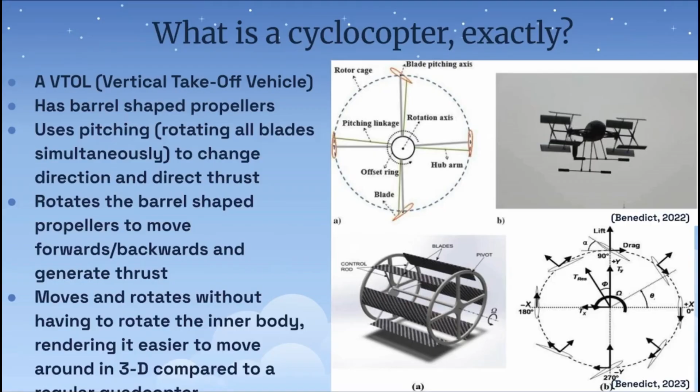The decoupling of the fuselage orientation from the flight path allows for immediate seamless transitions between hovering, forward flight and backward flight, rendering the vehicle significantly more maneuverable in complex 3D environments compared to conventional rotorcraft. The core of this agility lies in the mechanical assembly of the rotor cage. The system utilizes teardrop-shaped airfoils connected to a central hub via a pitching linkage.

The thrust vectoring is achieved through eccentricity, which is controlled by offsetting the center of the control ring relative to the axis of rotation. Shifting this offset center mechanically forces the blades to oscillate. This oscillation is defined by two variables, magnitude and phase angle. The phase determines the thrust direction.

For example, phasing the blade pitch to maximize the angle of attack at the top of the arc generates upward lift. Shifting that phase angle by 180 degrees directs its thrust downward. This requires a robust assembly of servos, pitch links, and pivoting blade struts to maintain structural integrity, managing dynamic aerodynamic loads.

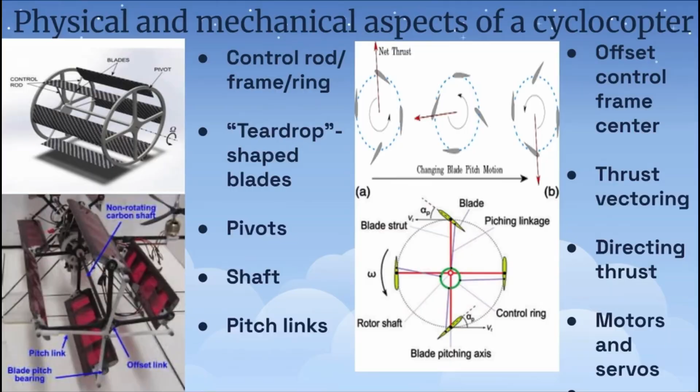My experimental design is grounded mainly on three foundational studies. First, Benedict et al. 2016 established the feasibility of small-scale cyclocopters with an 800-gram vehicle. They demonstrated that a passive pitch mechanism could successfully achieve stable flight with 8 degrees of freedom.

Crucially, they implemented a hybrid control strategy where pitch, roll and yaw were managed entirely by differentially varying the thrust vectors of the 4 individual rotors. This eliminates the need for traditional control surfaces, confirming that the mechanical architecture is viable and serves as a baseline for my larger 3 to 5 kilogram prototype.

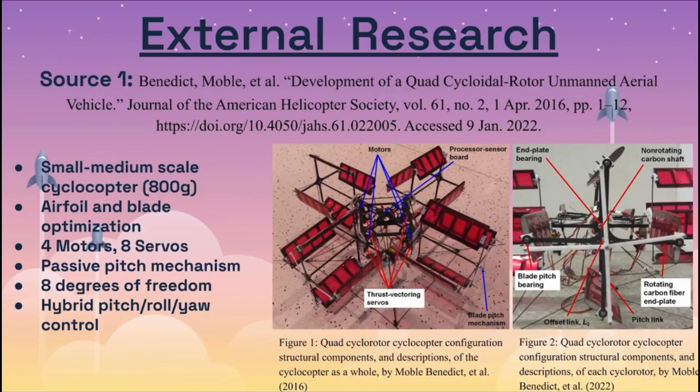Rami and Pascoa 2019 provided the critical aerodynamic data for takeoff and landing, using advanced fluid dynamics simulations to analyze the rotor's behavior and ground effect. They found that cyclorotors generate a concentrated pile-like downwash flow when operating in close proximity to the ground, specifically at low altitudes like 2 meters.

This flow obstruction creates a high pressure level that results in a positive ground effect. This phenomenon significantly enhances the total efficiency by providing a cushion of air for the aircraft. However, the data revealed that static operating schedules are inefficient. Optimal settings shifted from a 30-degree pitch at 200 RPM at 2 meters to a 40-degree pitch at 400 RPM at 5 meters. This necessitates an active control system to dynamically adjust these parameters during flight.

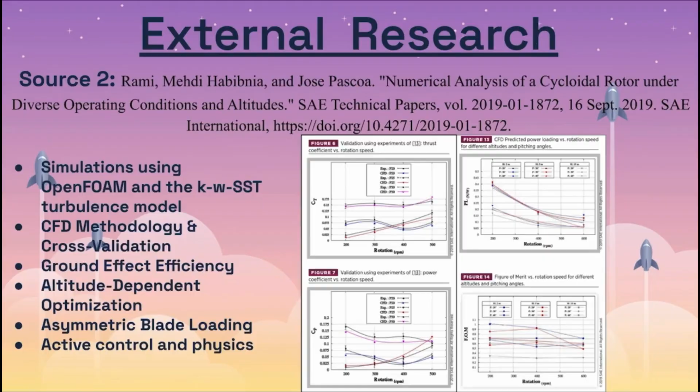Halder and Benedict 2022 addressed the physics of scalability, which is critical for my heavier build. They identified a fundamental conflict between aerodynamic and structural scaling. Aerodynamically, scaling up to 5 kilograms is favorable. As the rotor size increases, the Reynolds number improves from 1 times 10^5 to 5 million, resulting in higher force efficiency due to smoother airflow over the larger blades.

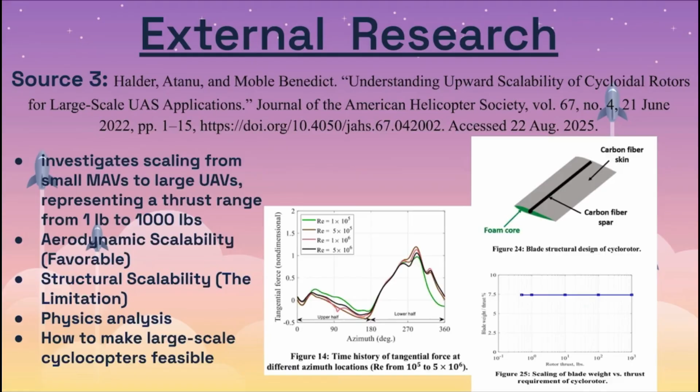However, structural scalability is a limitation. The weight of the blades increases disproportionately due to the square-cube law. To counteract this, the study validates using specific material compositions, foam cores with carbon fiber skins and spars, to minimize rotational inertia while maximizing stiffness.

Applying these findings, this project targets the construction of a 3 to 5 kilogram functional prototype within a strict $900 budget. This medium scale category allows for more outdoor flight but requires significantly stronger components than those found in the literature. To address the structural challenges, I will use high-strength adhesives and composite materials similar to those referenced. The experimental phase will focus on airfoil optimization.

I will be testing variations of the symmetrical NACA 0018 through 0023 airfoil profiles to determine which thickness-to-chord ratio provides optimal lift-to-drag performance for the specific Reynolds number regime. The entire assembly is currently being modeled and analyzed in Autodesk Fusion to simulate mechanical stresses and verify the geometry before physical fabrication begins. By synthesizing the findings from these 3 studies, I have established a robust design framework.

First, I am adopting Benedict's validated architecture to ensure agility without excess weight. Second, I am integrating Rami's aerodynamic control logic. The flight controller will actively vary RPM and pitch, targeting 30 degrees at low altitudes, 45 degrees at higher, to exploit the pressure bubble for maximum lift efficiency.

Finally, I'm adhering to Halder's material constraints by using carbon fiber composites to mitigate the weight penalties of scaling up to the 5 kilogram class. So at first, when I tried to design the cyclocopter, I couldn't find any previous people who have made the design before, so I had to look for CAD files, and I couldn't find many of those, but this is the first one I found.

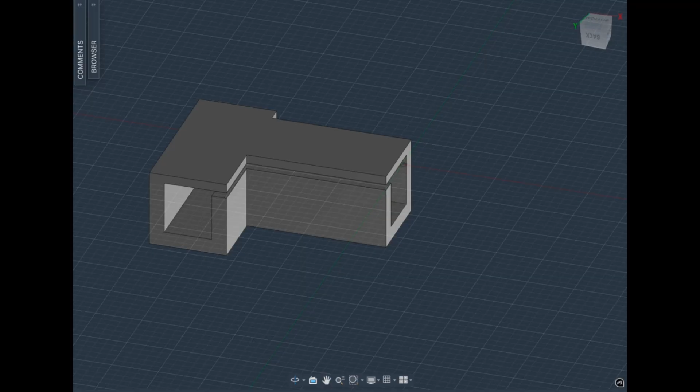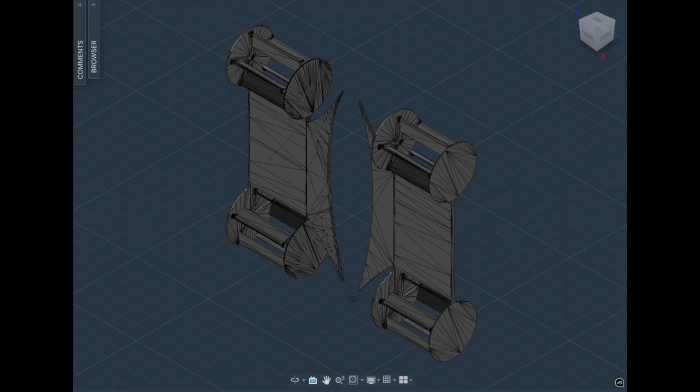So this is the first one I found, and then I had to learn how to use Fusion 360 and how to manipulate rigid bodies in order to make the cyclocopter what I want. And now I not only know how to do that, but I find it fun to do so. So this was the initial design, and then I decided to modify it to this design. So basically, I removed all the propellers from it, and now I have this body, and then I made the body for this. But then eventually I had to get rid of this design.

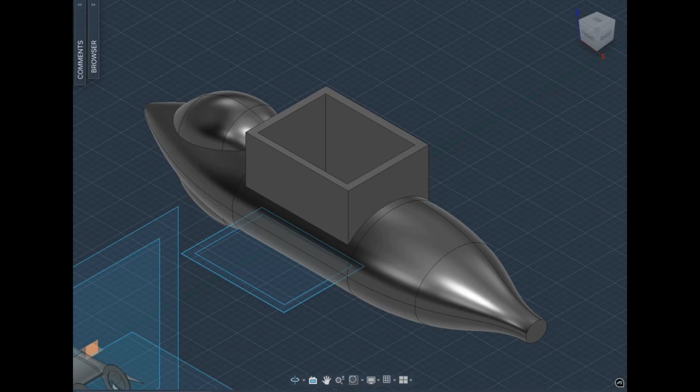And then I have more designs of other things, such as a snap fit box that I was planning on putting here, but I decided that that's not as important. And eventually I realized that I need the exact materials that I will be using for building my project in my Fusion 360 in order for it to have any real value. So this is one of the motors I'll be using, and that's for rotating the propellers.

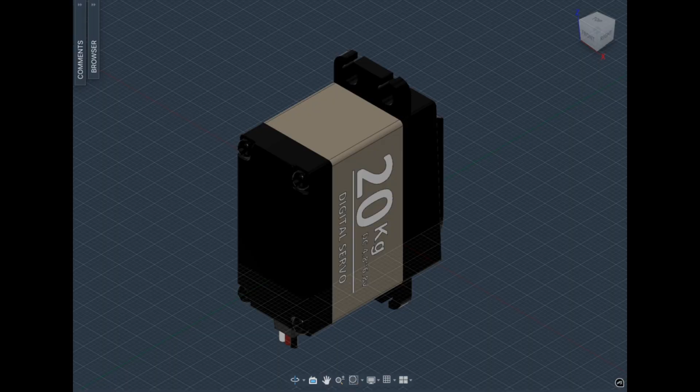And I will be using 20 kilogram servos for manipulating the center of rotation of the linkage mechanism, where all the linkage is attached to, and the whole propeller rotates around. So this helps the cyclocopter steer, and it helps it maintain throttle, and it also helps it rotate its wings to direct thrust. And so, through research papers, I found out that these NACA 0018 wings were the best choice of wings for a higher scale design, at least in simulations, but I wanted to test that in real life.

Okay, and then, so, I copied off that, but I followed Mobile Benedict's design where he cut out rectangular slats, and then that made the blade significantly lighter, and I will wrap this in mylar film just as Mobile Benedict did, and I will run a 6mm carbon fiber tube through each blade in order to secure it and to make it stiff, and also secure it to the outside propellers, the outside frames for the propellers.

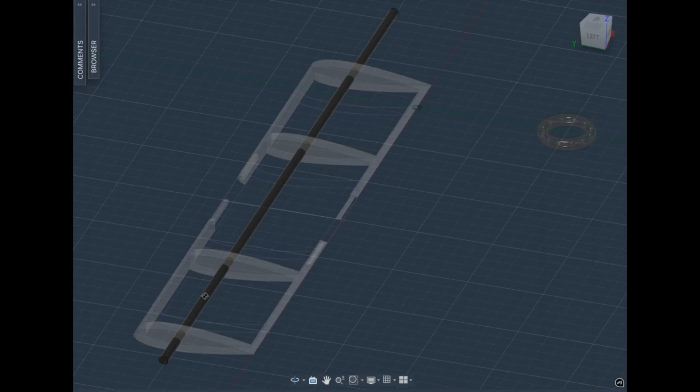And then, well, I had to get all of the materials I would be using to build. So these are the bearings, some of the bearings I'll be using, and so I found all of these through CAD files and CAD websites. So these are the servos, those are the shaft collars. These are some more bearings, and then that's a screw. And these are some of the motors I'll be using. And then this is the frame I'll be using.

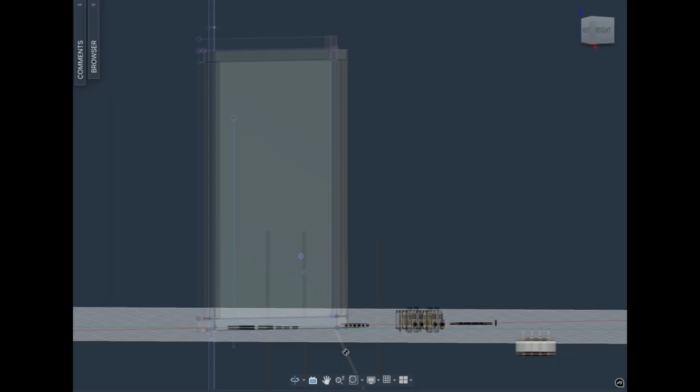So, my original plan was to have the rods for where the propellers spin on to go off diagonally, but then I realized that it would be more stable if I put it in the middle, like I did here. So this is the design I'm currently working on. So this is the 8mm steel rod where the cyclocopter will be rotating around. It'll be stationary, this rod will be stationary.

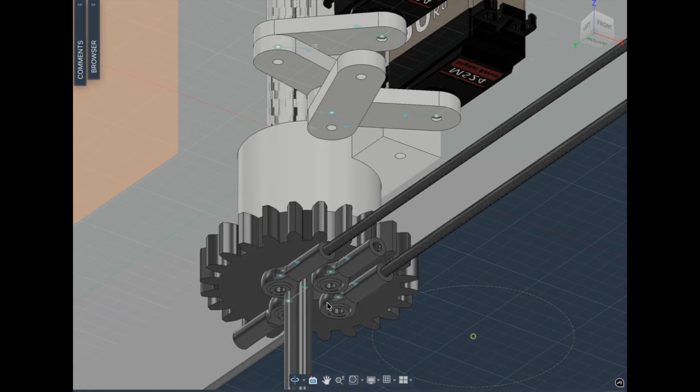And then these are the linkages with the threaded rods that are supposed to connect to the blades in order to steer them and direct thrust and throttle. And then this is a servo mechanism, and this is supposed to change the center of mass of rotation. So it's supposed to move around this bearing housing. There's a bearing inside that is attached to this linkage mechanism.

And so what those servos will do is move the center of mass of this mechanism around. So as you can see, the center of rotation is right here at this point, but theoretically it can go anywhere around here. But I just realized that these linkages may cause some interference, so I need to update that.

And then I need to complete the propellers, and then complete the rotation mechanism, as well as the linkage mechanism, and then I will simulate using dynamics, and then eventually I will build the cyclocopter in real life and test it in real life. But first I will test it in simulations, such as fluid dynamic simulations. But hopefully I will be able to demonstrate a working flying cyclocopter by a state competition if I qualify.

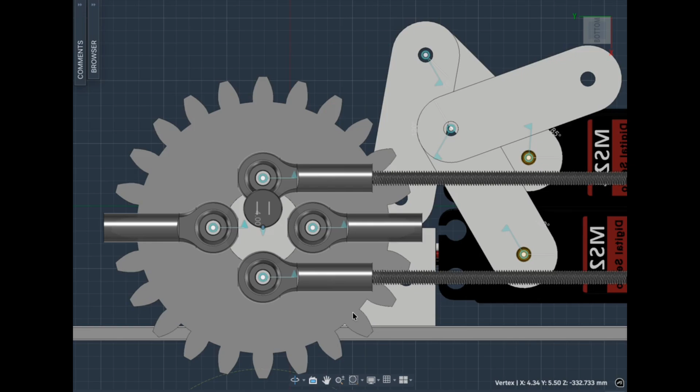But for the TCRSF competition, I will be displaying the simulation results for my cyclocopter, and I am still working on the model as of now. This is my progress.